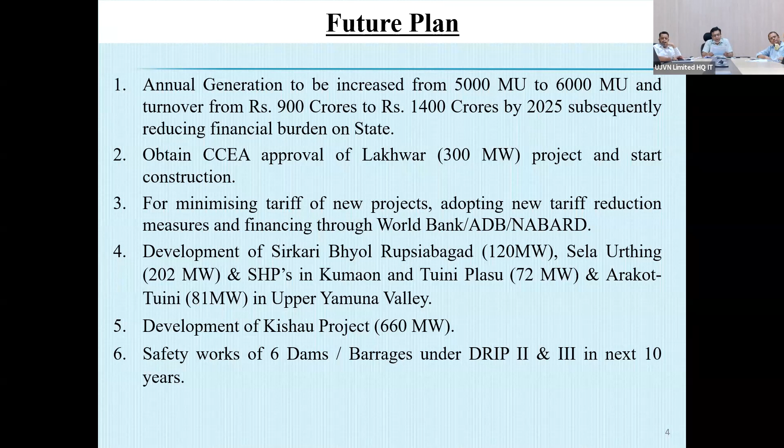Only for this project, it's a multi-purpose project. Financial approval is awaited for that project from the cabinet.

We have a total of 17 projects under operation currently. There are 10 LHPs and 7 SHPs. LHPs range from 30 megawatt to 304 megawatt capacity, and SHPs range from 1.5 megawatt to 20.4 megawatt capacity.

Presently our 5 projects are under construction. The biggest one is Vyasi, 120 megawatt, and the rest are SHPs. Vyasi is supposed to come online this year by November end or maybe December, and the other, Kaliganga second, is also coming this year, and Suringad is also coming this year only.

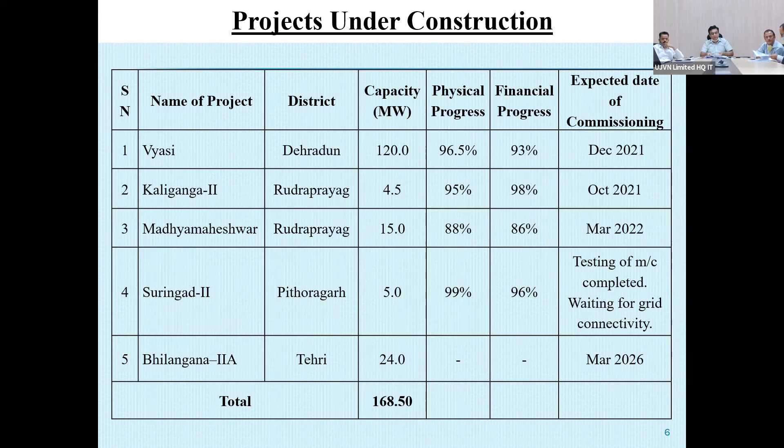Under construction, Vyasi HEP will generate around 353 million units yearly. After the Lakhwar project, upstream of it, is constructed, it will start generating in the range of 425 million units when it runs in tandem with the upper project. The cost of this project as of September 2021 is 1777 crores, out of which 1683 crore has been invested so far, and the physical progress is around 97%.

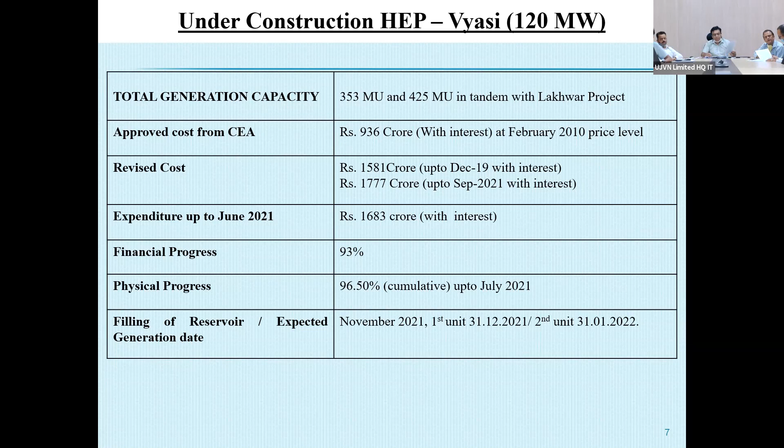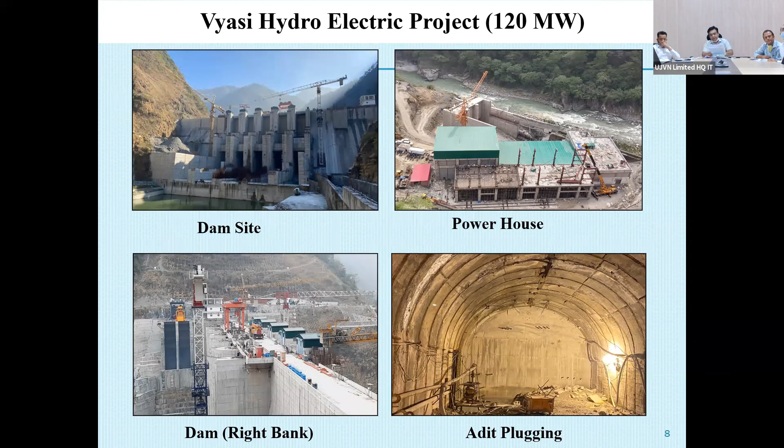There are some photographs of this project showing the dam site, and from the dam site there is a tunnel to the power station, around 6 to 7 kilometers long. This is the dam and one adit which has been plugged.

Lakhwar is the next project we should be working on. This project will generate 573 million units per year and has a water storage capacity of 330 million cubic meters. Both Lakhwar and Vyasi projects are on the Yamuna River. This project will take around 69 months to build and has a very high dam of 204 meters. All mandatory clearances have been achieved, and only approval from the Cabinet Committee of Economic Affairs is awaited for financial assistance. So far, 411 crores has been invested on this project.

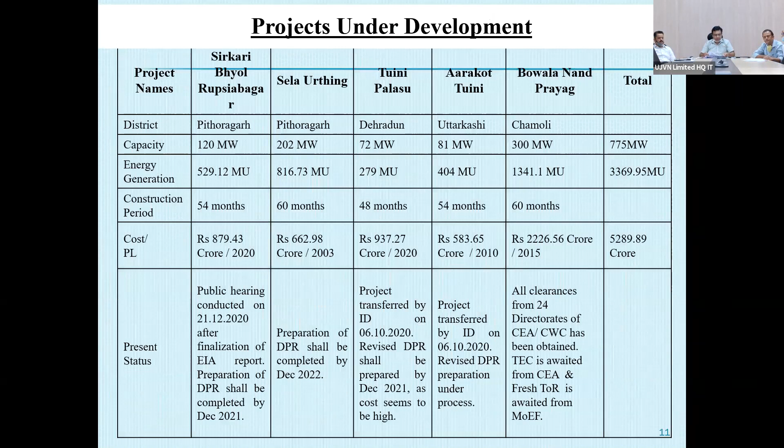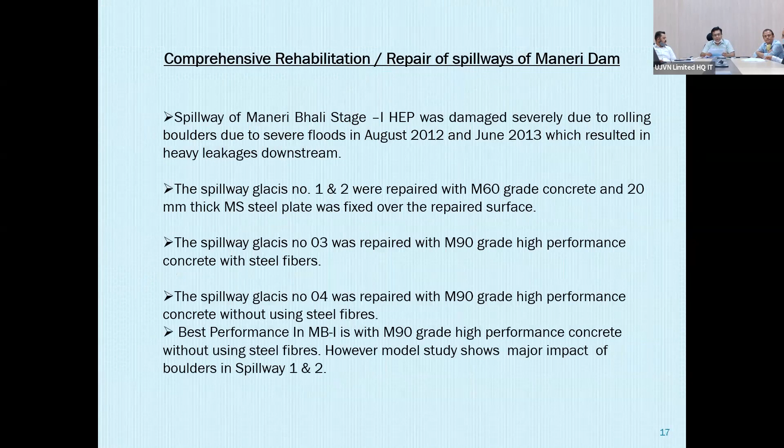5 more LHPs we are going to build, which will increase our capacity by 775 megawatt. We have carried out renovation, modernization and upgradation of Pathri Power Station from October 2011 to November 2014, in 37 months we carried out RMU of Mohammadpur Power Station from 2010 to 2013, and of Khatima Power Station from 2012 to 2016 in 47 months. And we have 2 dams, Maneri Dam and Koti Dam, Ichari Dam, and 3 barrages - Dakpathar, Pashulok

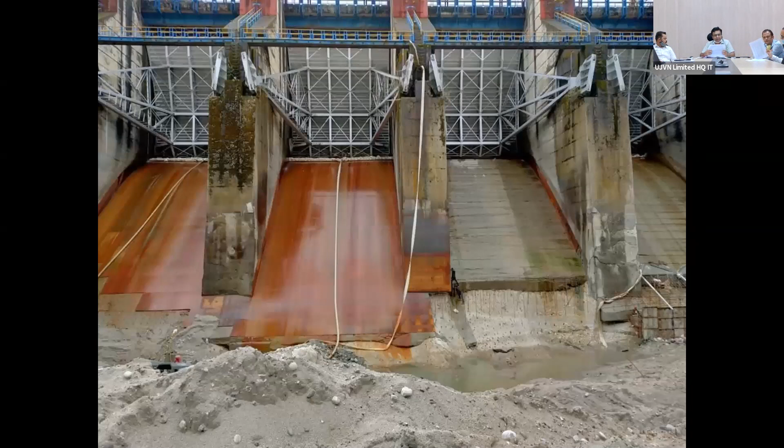and Asan barrages. We are doing DRIP work and rehabilitation work on these because they are very old. Some 235 crores has already been invested on those, and 432 crore more is going to be invested on these works.

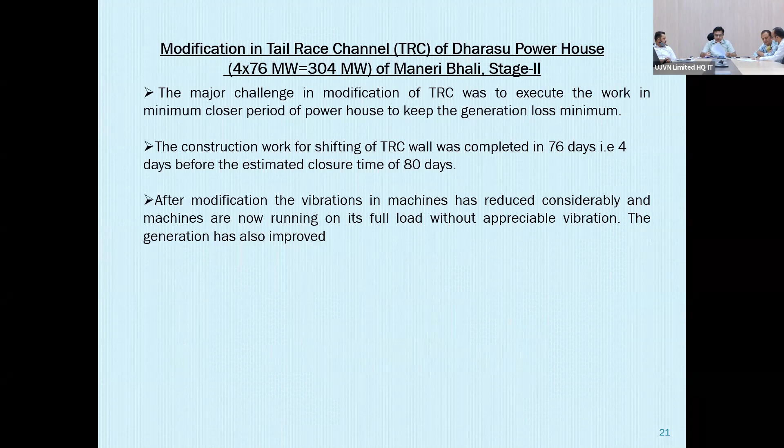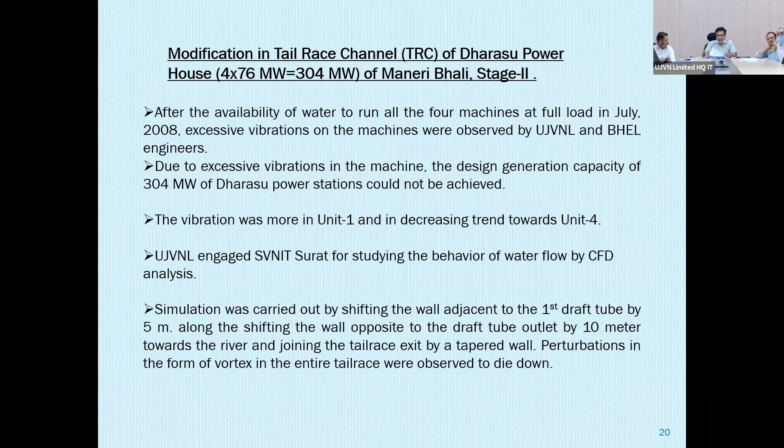One major last thing I would like to tell - we have done modification in the tail race of our biggest power station, Maneri Bhali, that is of 304 megawatt. After commissioning, the machines were having vibrations and were not able to reach full capacity because water evacuation was not proper from the tail race. For that, CFD analysis of the tail race was carried out, and as per the analysis, the tail race was modified, and after that we could achieve full generation.

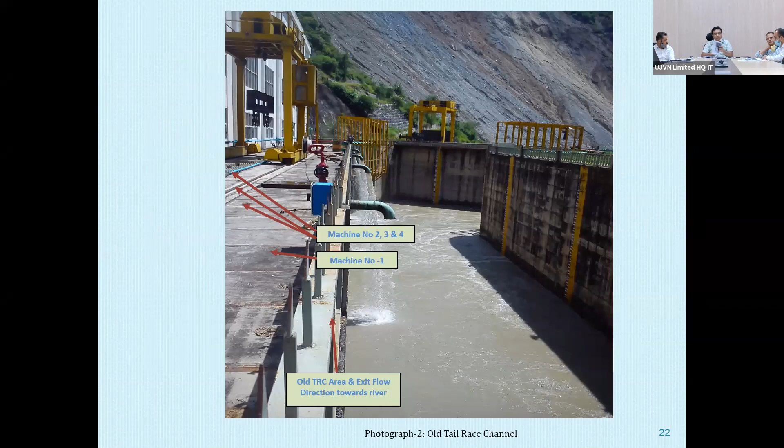In this, the tail race wall was shifted. One wall was shifted 5 meters and another by 10 meters, and the old walls were removed. Thank you, sir. Thank you.

Thank you. Kindly just tell me one thing.

Sir, you have renovated and modernized your existing structures, no? Basically, am I right? Yes, sir. So how has it impacted the life of plants? Can you just elaborate on that?

So in RMU renovation, basically we do reverse engineering, and the major parts of the machines, like the underwater parts, are mostly replaced. So most of the parts of the machines are replaced. Most of the obsolete technology is replaced, for which we are not getting spares presently. So the plant becomes almost as good as new, and because of that we get an extension of 20 to 25 years.

Plus, the plants are old, and at that time the average efficiency of the runners was in the range of say 75%, which over the period of time gets further reduced, and they must be running lower than 70% efficiency now. The current runners which we are now getting are above 94.5%. So straight away a 24.5% increase in the efficiency of the runner itself is there. So with the same amount of water, we are increasing generation.